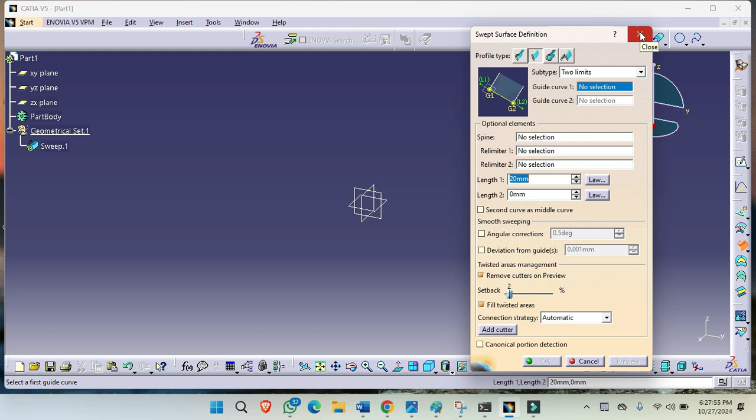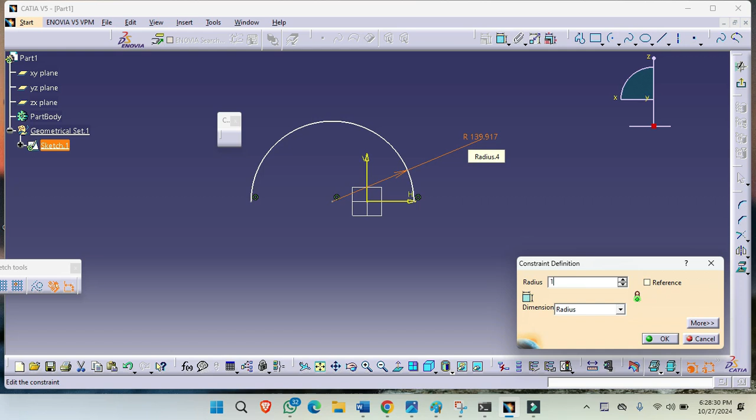Click on sketch and then click on arc, and give the constraint, change the value 139 to 100, and then exit the workbench. Again click on the plane and select this plane to get one more curve. Click on the value 50 and then exit.

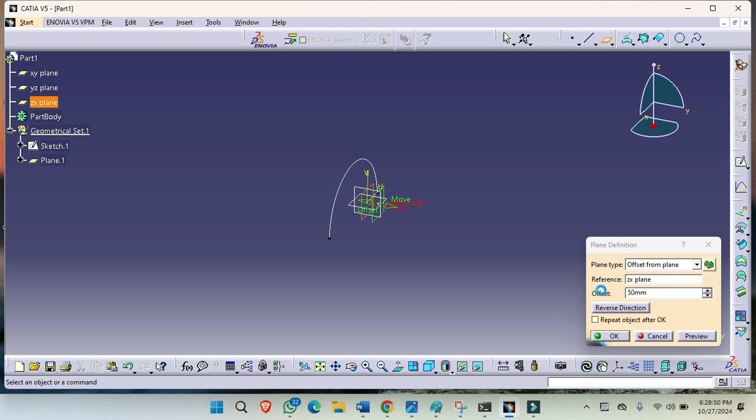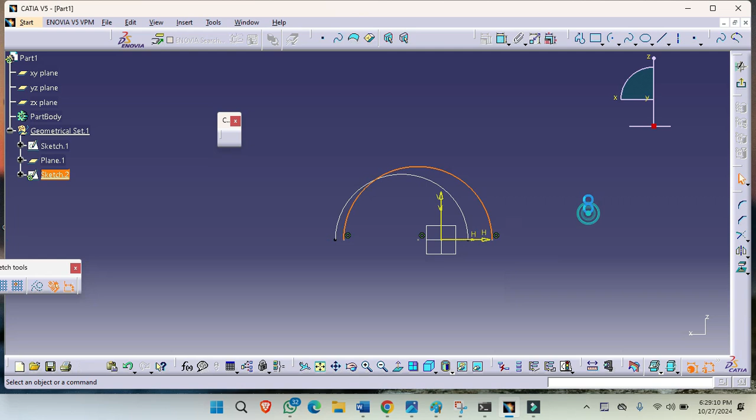Click on sketch. Click on arc. And give constraint 100. Coincidence. And then exit. So here we have two guide curves.

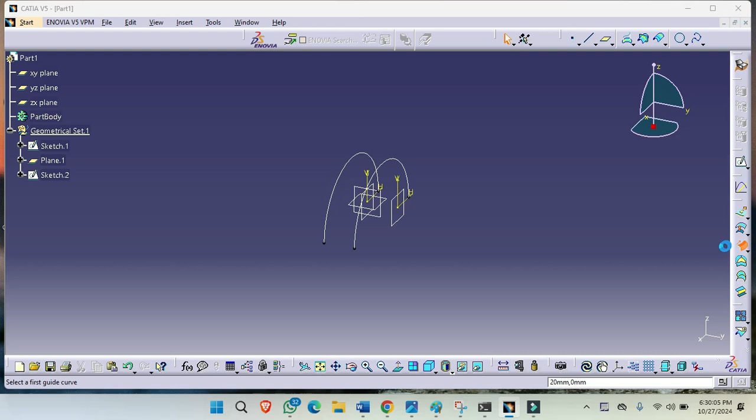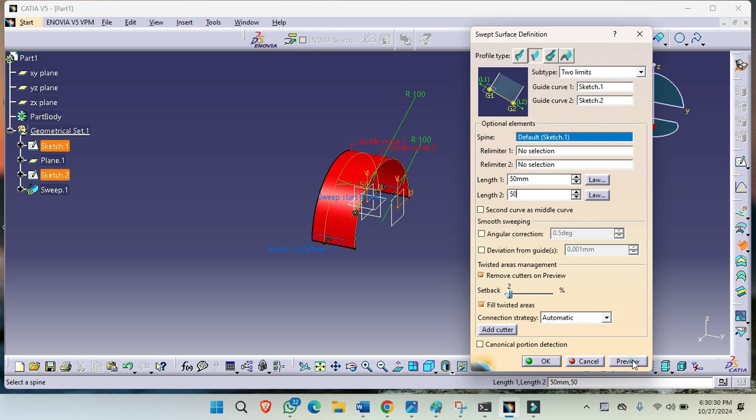Click on the sweep command and then select guide curve 1, select guide curve 2. Click on preview. Here you can see the profile. We can change the value length 1 to 50, length 2 is also 50. Click on preview. Hide this surface and then move on to the second command.

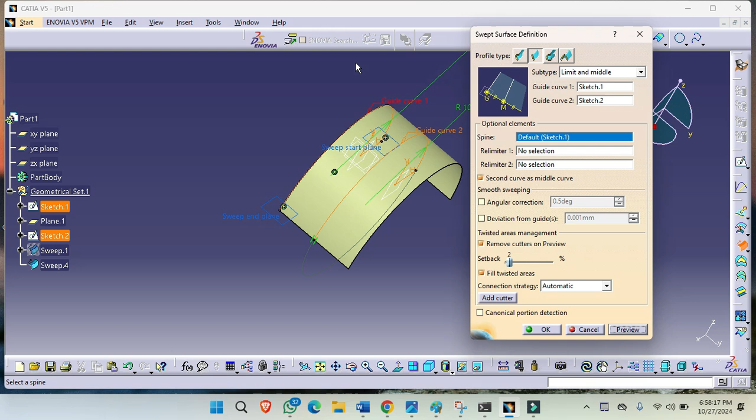Limit and middle. For this command we need two guide curves. Select guide curve 1 and select guide curve 2. Click on preview. As you can see here, the guide curve is centered on this surface. Click on OK, then hide this profile and move on to the third command, with reference surface.

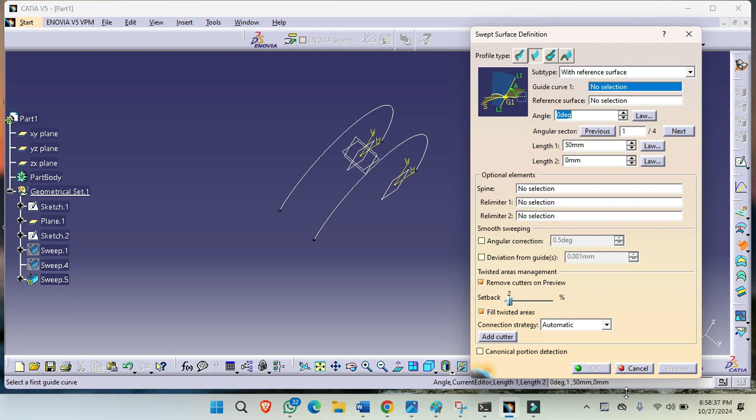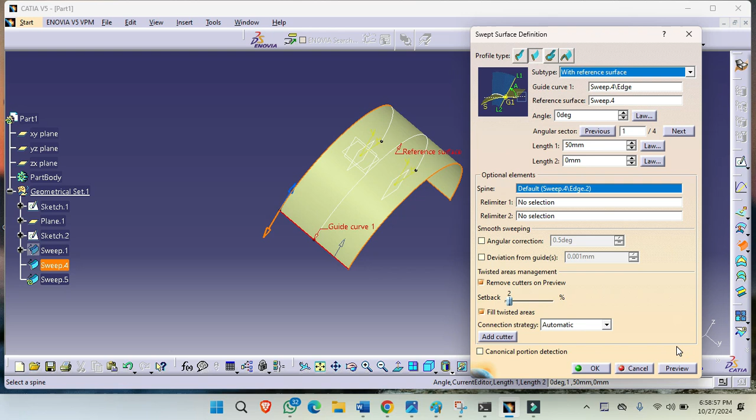Hide the surface, and then click on with reference surface, select the guide curve, select this surface and click on preview. As you can see here, this profile. Click on OK. Again hide this and hide this. Now move on to the fourth command, with reference curve.

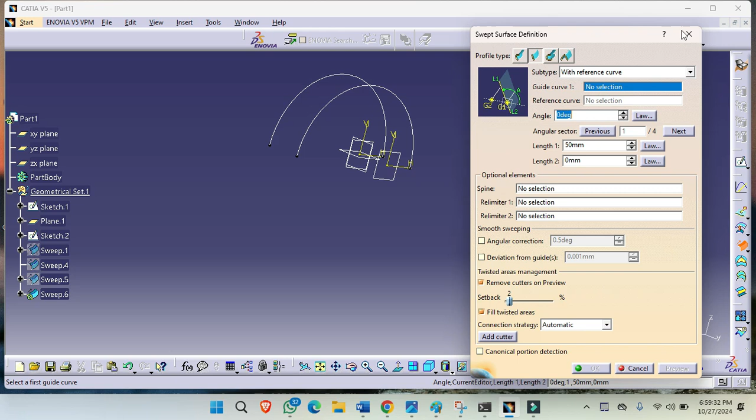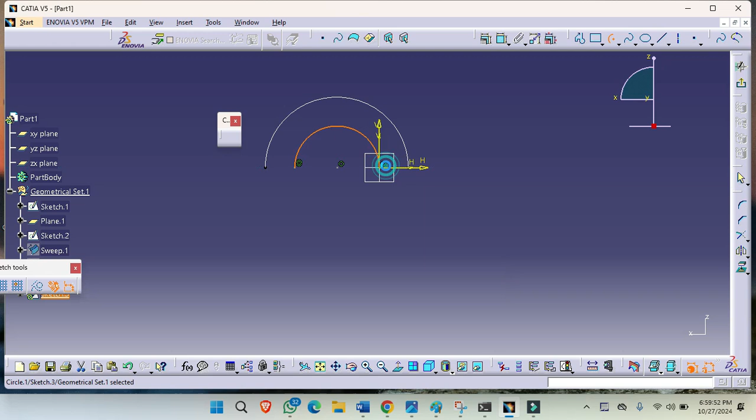Click on with reference curve; we need to have one guide curve and one reference curve. Click on sketch and then select this. Click on arc and then exit. Hide this curve.

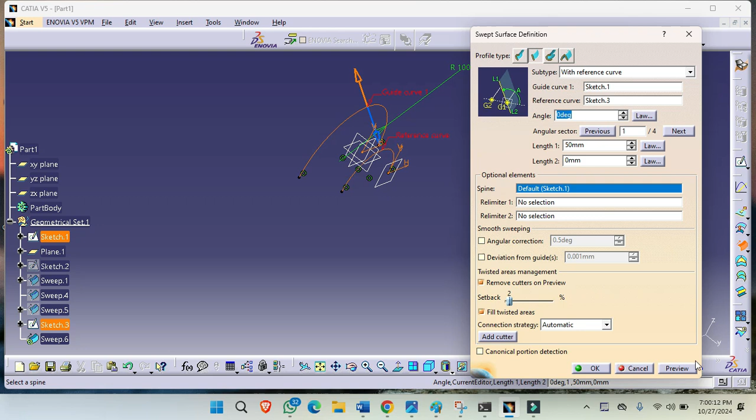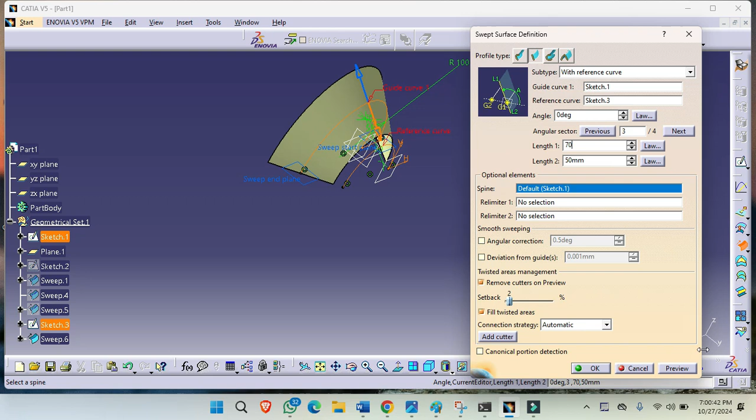Click on the sweep command, then select guide curve 1 and select the reference curve. Click on preview and change the direction. Click on preview, and you can change the value from 0 to 50. Click on preview and then OK. Now moving on to the next command, with tangency surface.

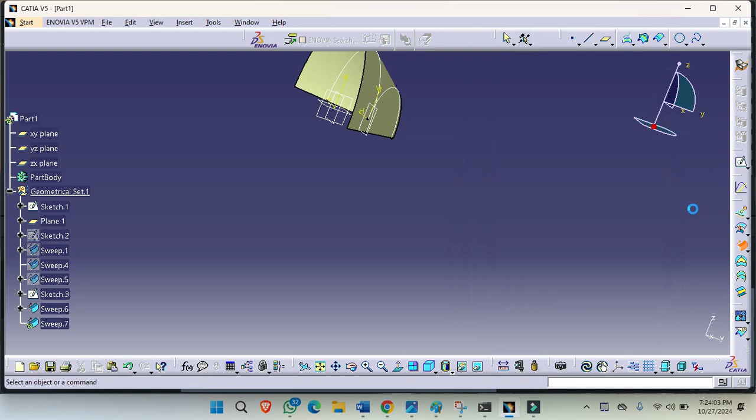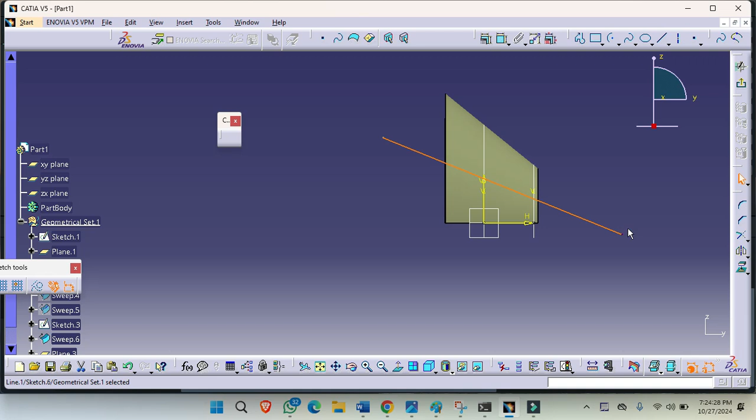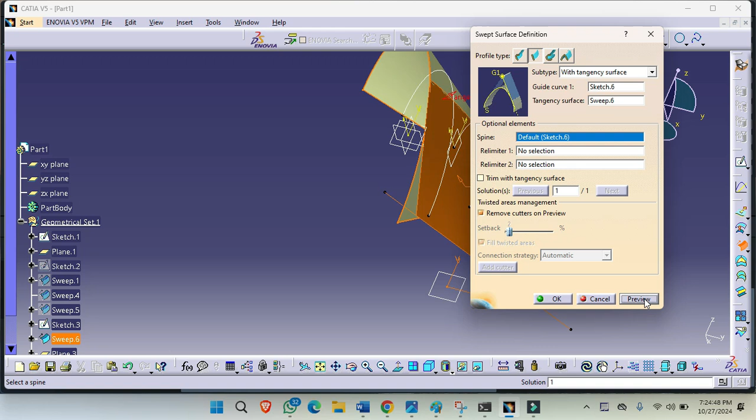Start by creating a sketch. Create a plane, click on OK, click on sketch and select a plane, create a line, and then exit. Now go to the sweep option and select the curve and this tangency surface. Click on preview. You can see here this profile is tangent to this surface. Click on OK.

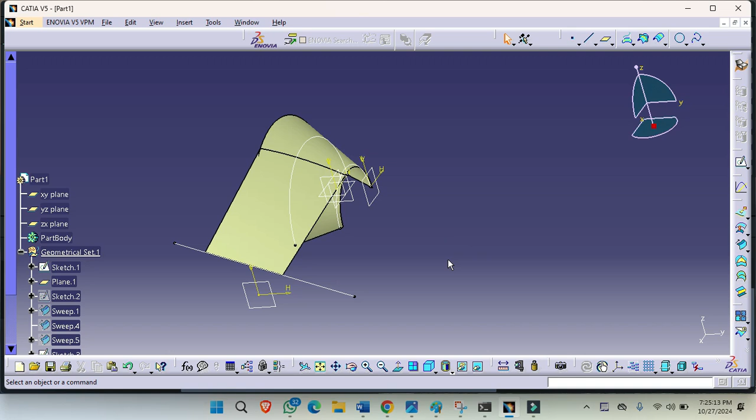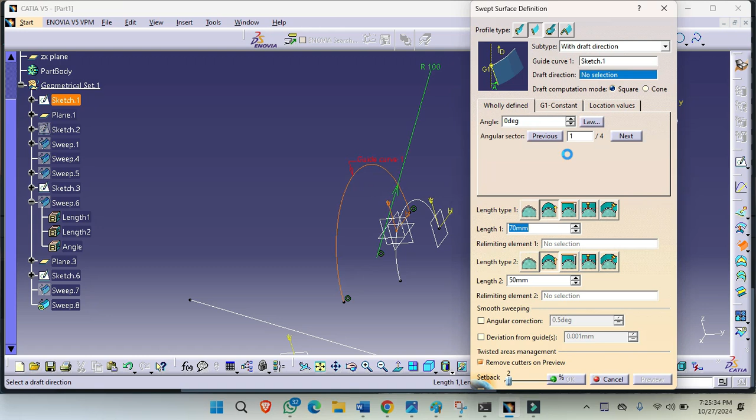After that, we move on to the next command, with draft direction. Hide this. Click on the sweep command, select the curve and give the direction. Click on preview and change the value from 0 to whatever you want.

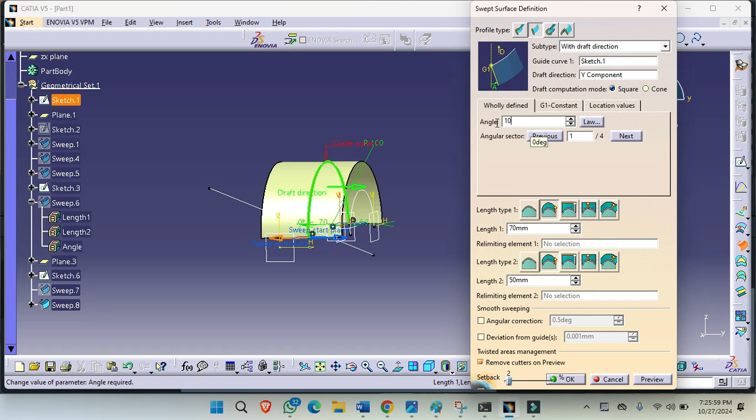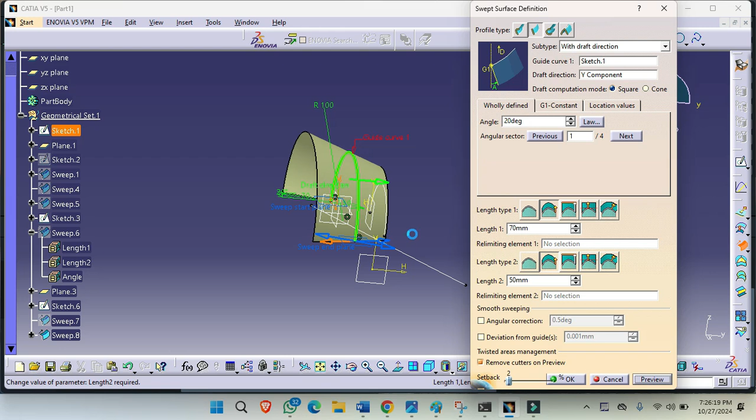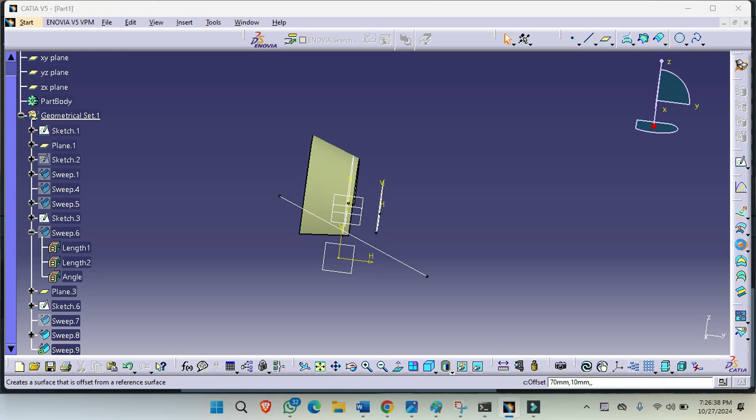Then click on preview. You can see here the draft is given. Change the value from 0 to 10 to 20. There are many options here, length 1 in millimeters and length 2. Click on OK, then move on to the last command, with two tangency surfaces.

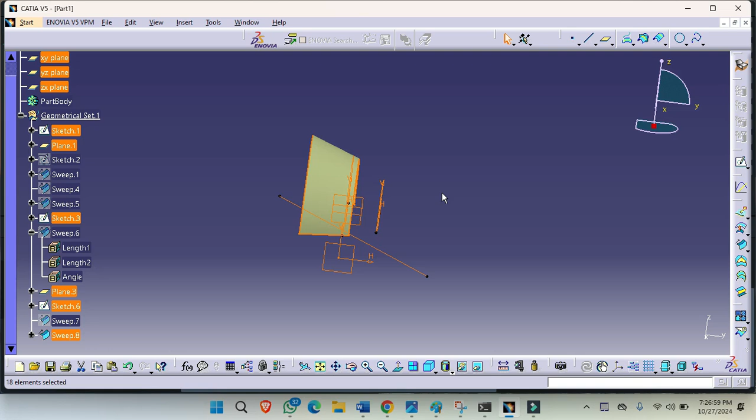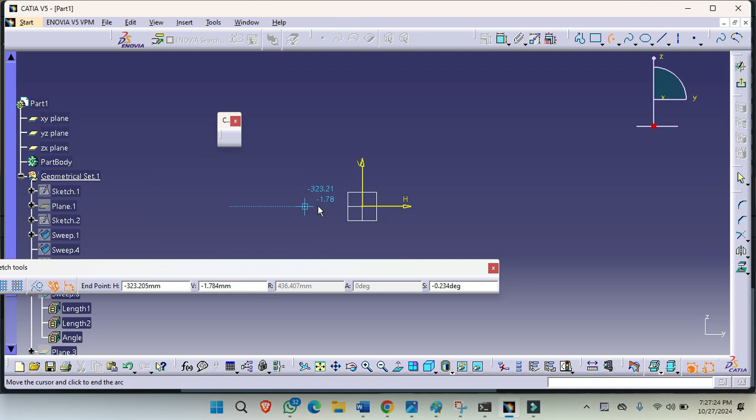Hide all the surfaces and curves. Click on sketch, select a plane and create an arc. Then exit. Again click on sketch, select this plane, create an arc, and then exit.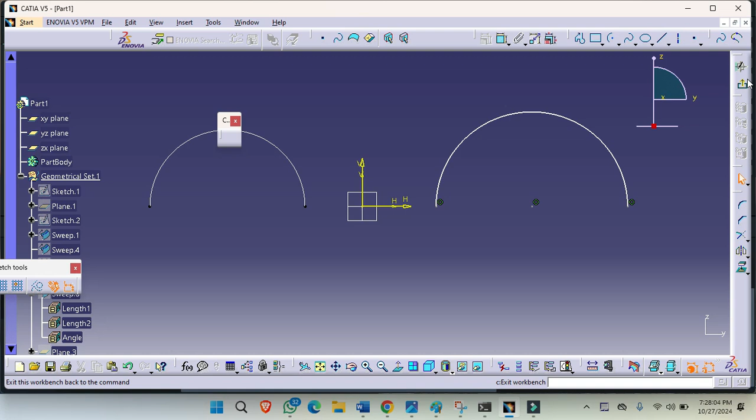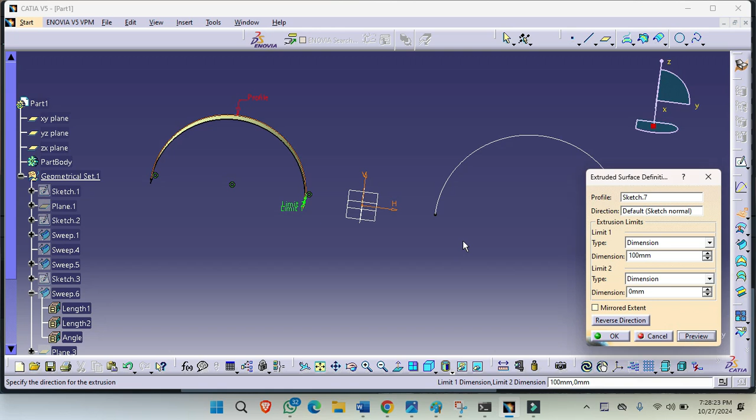Extrude this, change the value to 100, click on preview, again extrude this curve and then OK. Go to the sweep command and then with two tangency surfaces. We need one spine and two tangency surfaces. So create a spine.

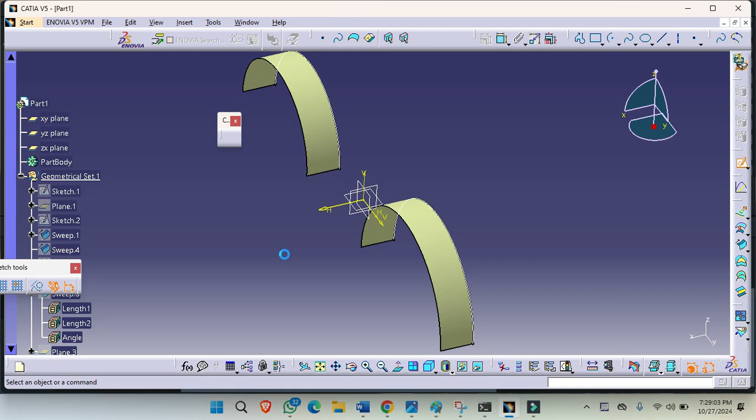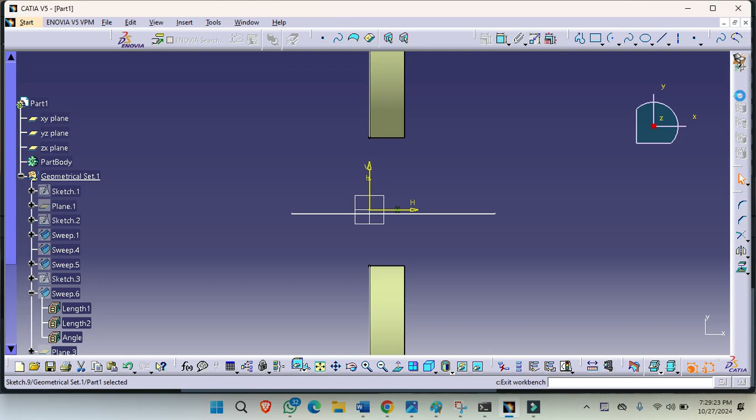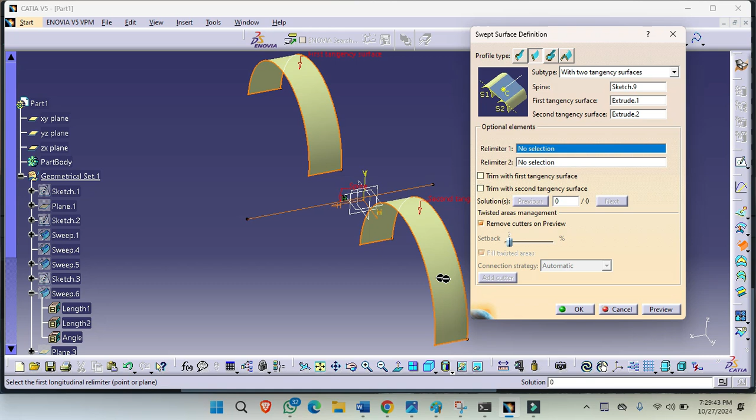Select sketch on this plane and create a line. Then exit. Go to the sweep command, select the spine, select tangency surface 1 and tangency surface 2, click on preview. You can see here this surface is tangent to this surface and this surface. Click on OK.